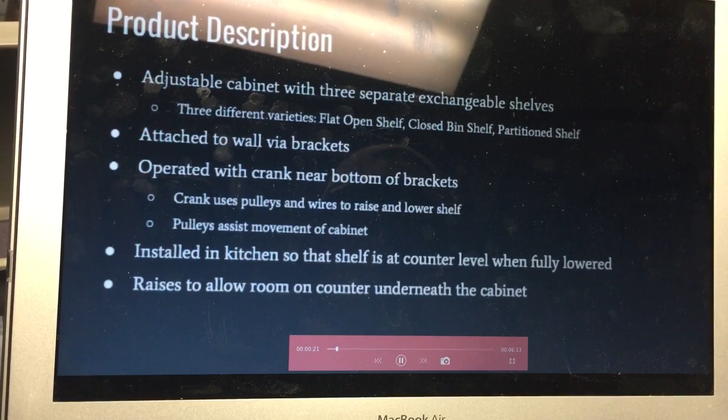Our product is an adjustable cabinet with 3 separate exchangeable shelves. These shelves come in 3 varieties: the flat open shelf, which is standard, the closed bin shelf to prevent things from falling down, and the partitioned shelf, which has dividers in the middle to separate items.

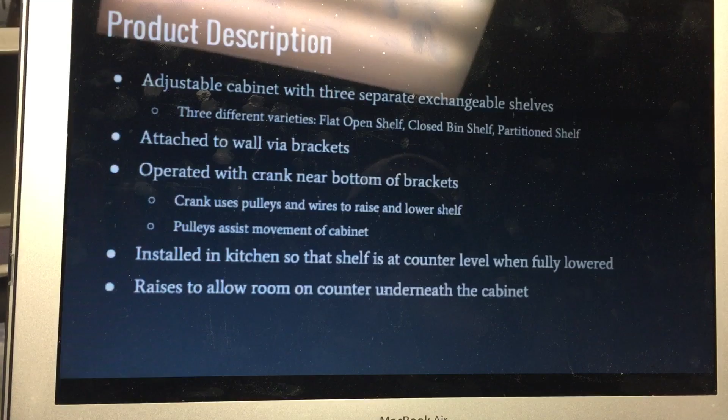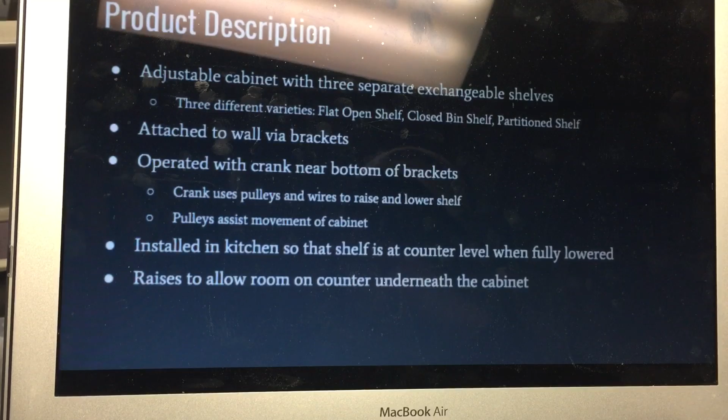The cabinet is attached to the walls through aluminum brackets. It is operated with a crank near the bottom that uses pulleys and wires to raise and lower the shelf. It can be installed in your kitchen so that the shelf is at counter level when fully lowered. When you crank it up, it allows for room under the cabinet for counter space.

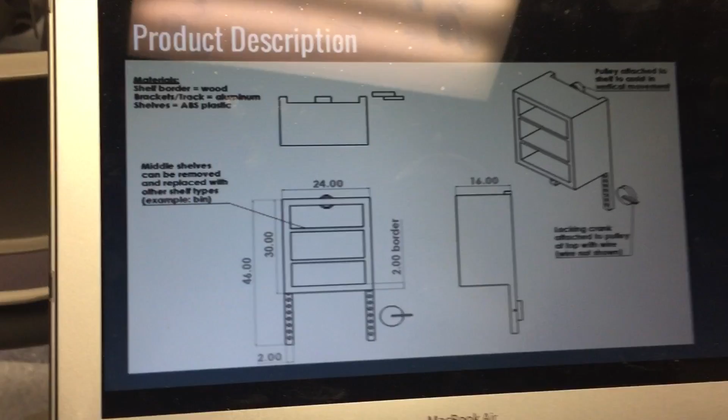Shown on this slide is the final design that we decided on with our group. The 3 views show each side of the product, and the isometric view shows how the adjustable shelf would look when mounted onto a wall. The measurements associated with the dimensions are in inches.

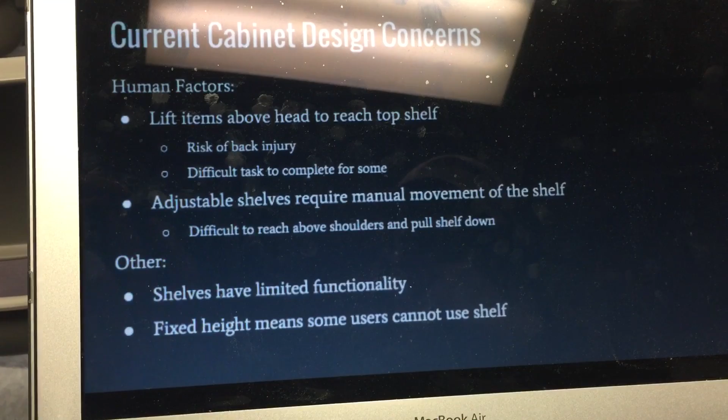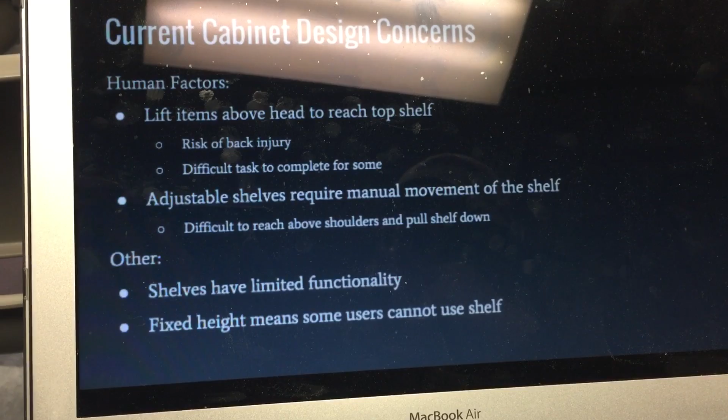There are a few human factors concerns with the way current cabinets are designed. One is that you would have to lift items above your head to reach the top shelf, and this could pose a risk of back injury by straining yourself, and this could also just be a difficult task for some people to complete. If they're too short or if they're in a wheelchair, it'll be nearly impossible to reach the top levels of a cabinet.

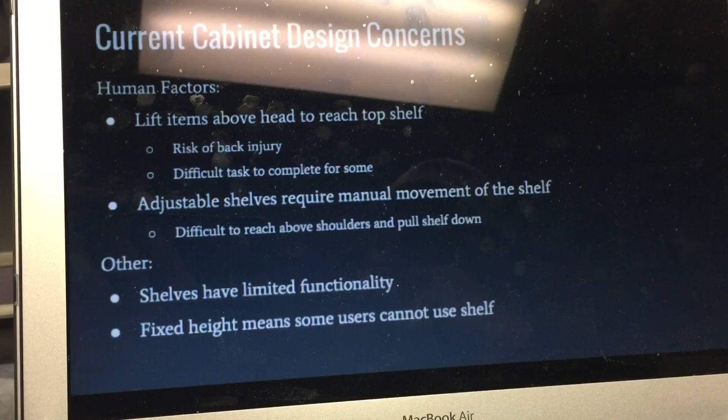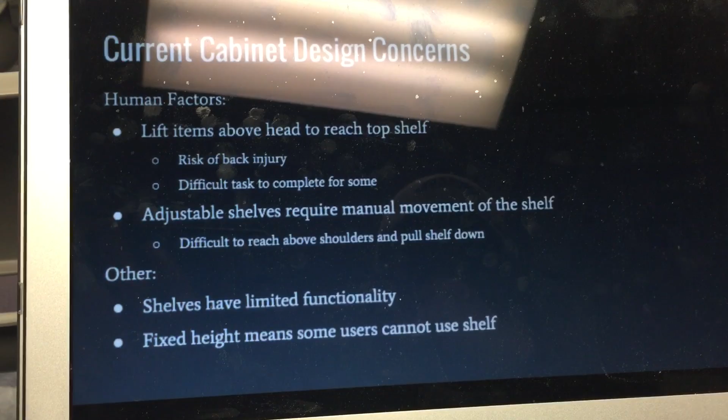And also, current adjustable shelves on the market require manual movement of the shelf, and it could be difficult to reach above the shoulders and pull the shelf down. Some other issues that current cabinets have is that the shelves have limited functionality, and like we mentioned before, the fixed height means that some users cannot reach the top of the shelf.

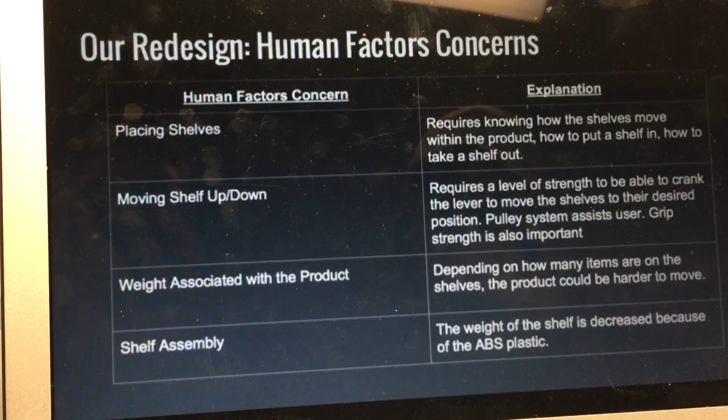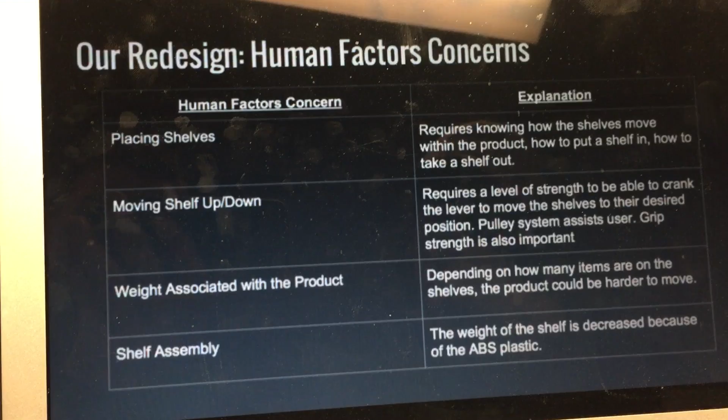There are a series of human factors concerns that are associated with the adjustable cabinet. Placing the shelves requires knowledge of how the shelves fit into their holders. This will need to be explained in an instruction manual to solve the human factors concerns. In The Design of Everyday Things, Don Norman talks about the importance of the user having the knowledge to know how to use the product. Without it, it is associated with a poor design instead of blaming the user.

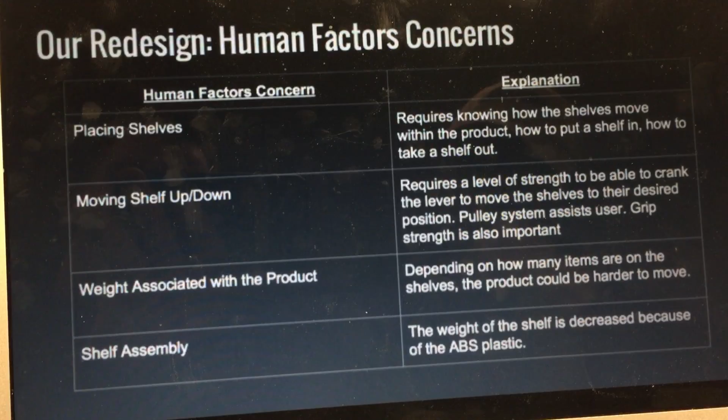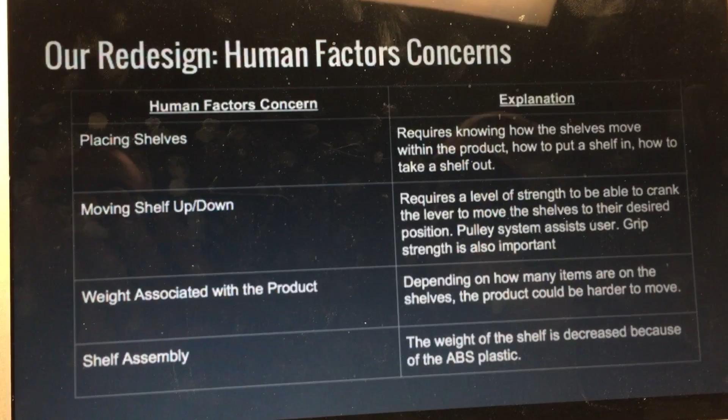Moving the shelves up and down is the next main human factors concern. Because we decided to go with a manual hand crank instead of an automated hand crank to cut the cost of the overall product, the adjustable shelf does require a certain amount of strength. We optimized the hand crank to make sure that it is the minimal amount of strength needed to operate the lever so that all ages of people will be able to use the adjustable shelf. The crank helps minimize the grip strength required because it is circular motion instead of a direct up or down motion.

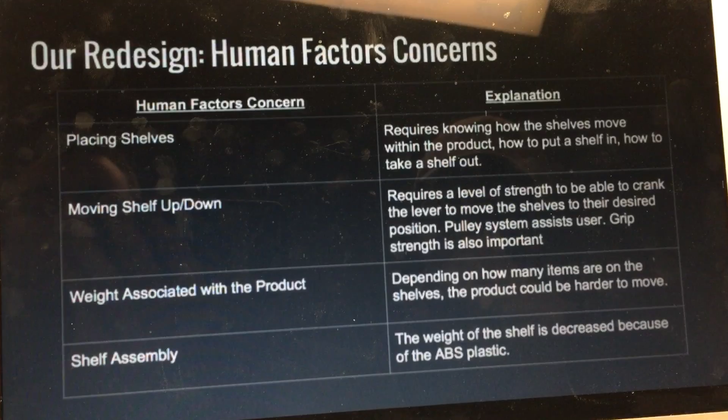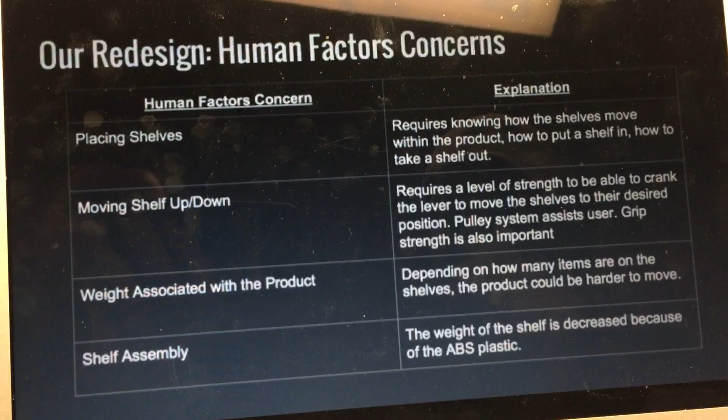Relating to this, the weight associated with the product plays a role in the human factors design. Depending on how many items are on the shelves, this could again make the shelves harder to move. It is important that the manufacturer informs the user that there is a weight limit associated with each individual shelf to ensure that the product is safe.

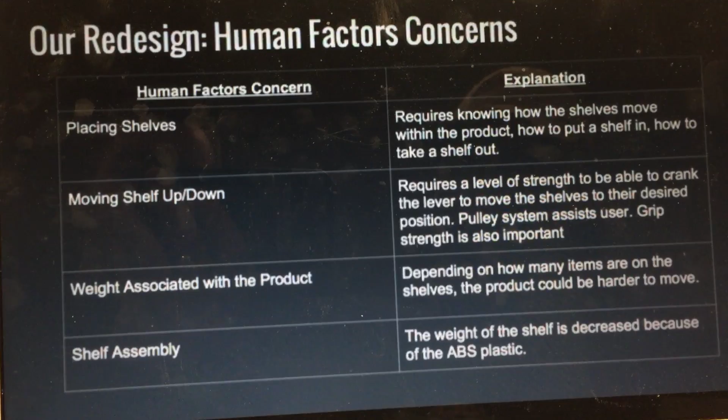Furthermore, the shelf assembly relates to the human factors design. The less pieces that are required to build the product makes it easier to assemble. Making the material of the shelf ABS plastic as opposed to wood or metal makes the shelf lighter and easier to mount.

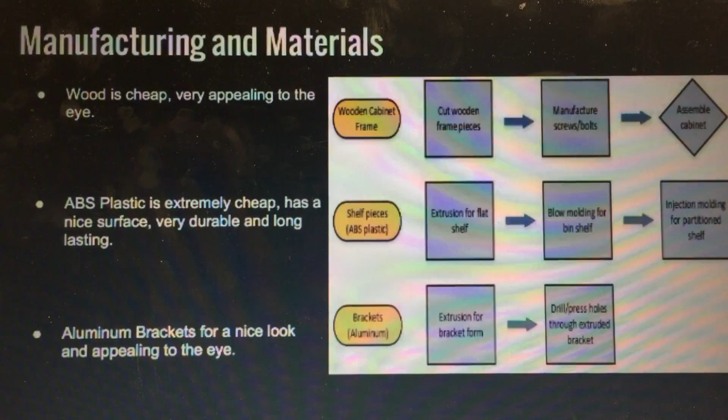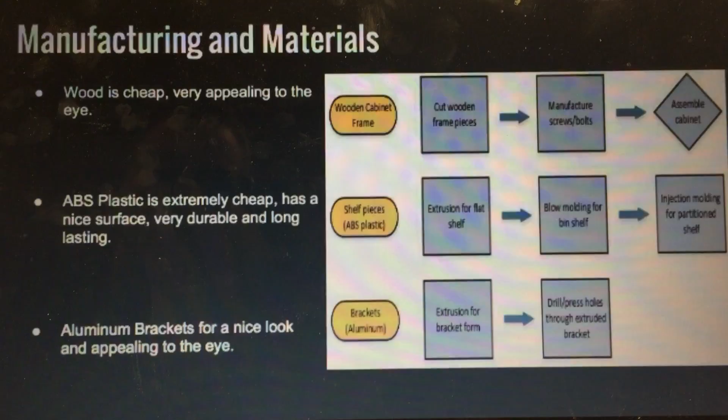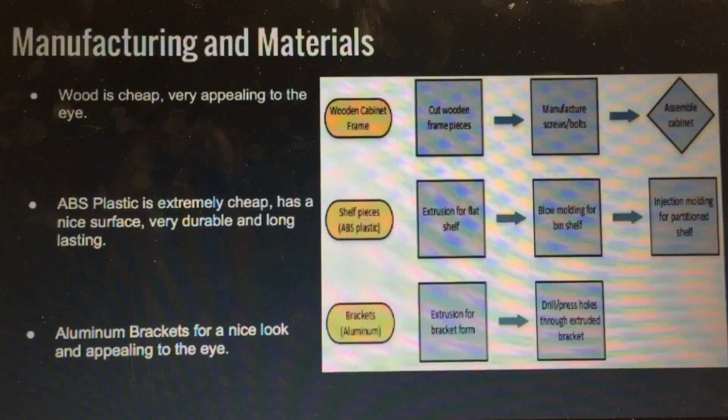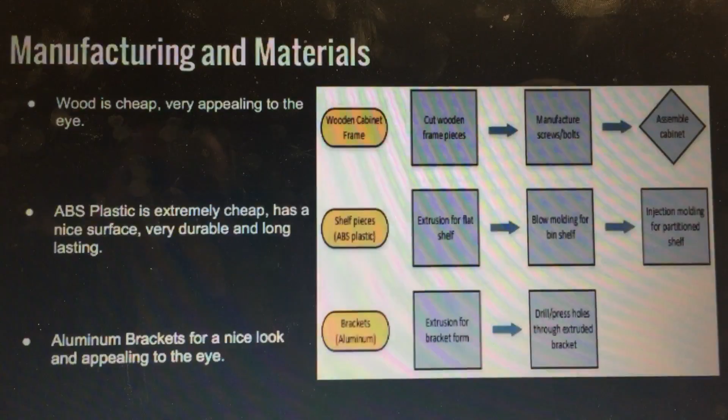We chose to extrude these parts for the flat shelf because it has the same cross-sectional area. Blow molding for the bin because it is hollow, and it is cheaper than the injection molding for the partition shelf. The brackets are made from aluminum and manufactured through extrusion because they too have the same cross-sectional area.

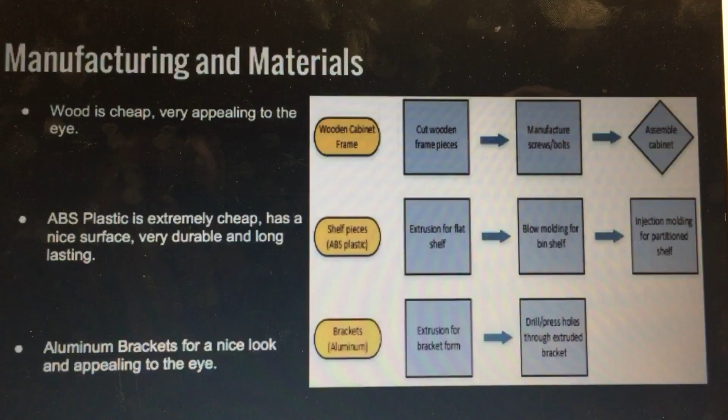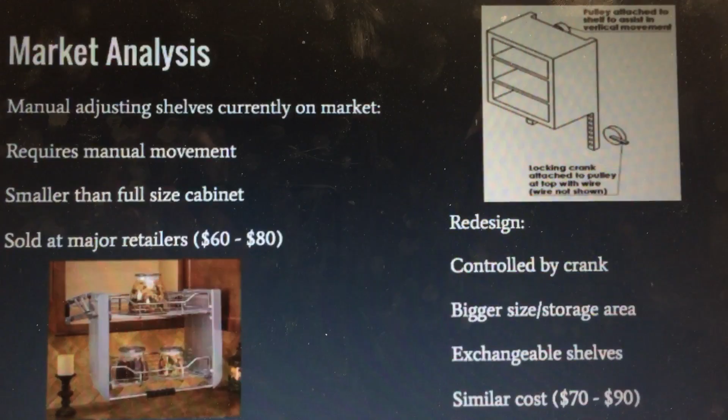During our market analysis, we found similar products. These products required manual movement, whereas our redesign will be controlled by a crank. This crank will be much easier and safer to use than manually adjusting a shelf, like the current competitors on the market. Also, the cabinets on the market currently are smaller than our redesign. Our redesigned cabinet will be bigger and will be able to hold more items than those currently on the market.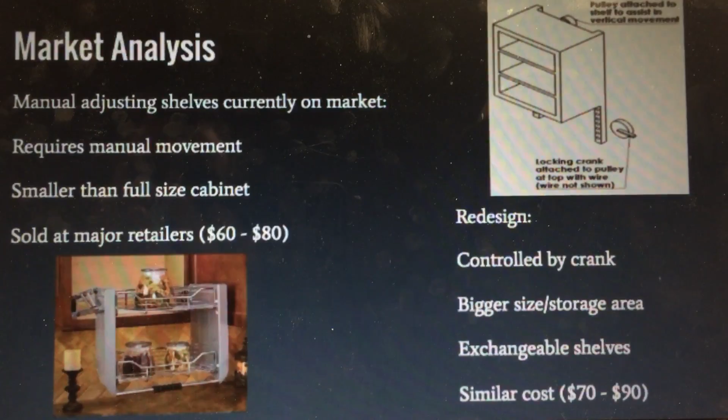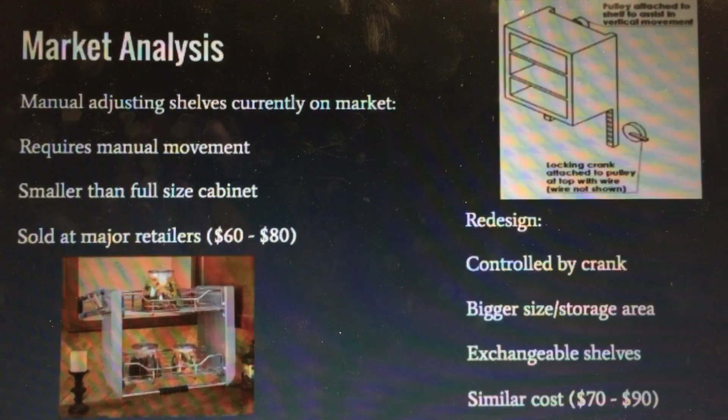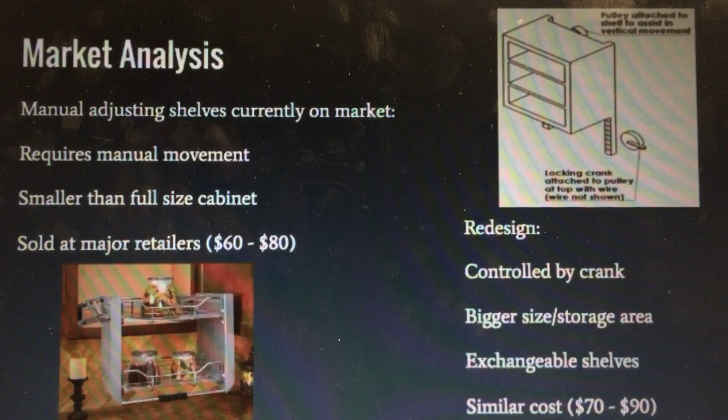An additional feature of our cabinet will be exchangeable shelves. There will be a flat shelf, a shelf that is like a bin, and a shelf that has multiple sections to it. The current adjustable shelves for sale are in the price range of $60 to $80 and are sold at most major retailers. Our group believes that we can make our redesigned cabinet for a similar cost.

There were a lot of things that we learned during this process of the product design labs in relation to what we learned in class. Through the 5 product design labs, we learned that there are multiple steps to be able to maximize the usability of the product. The engineer has to think logically as an engineer to make the best possible product, but also as the user to make sure that the product is as user-friendly as possible.

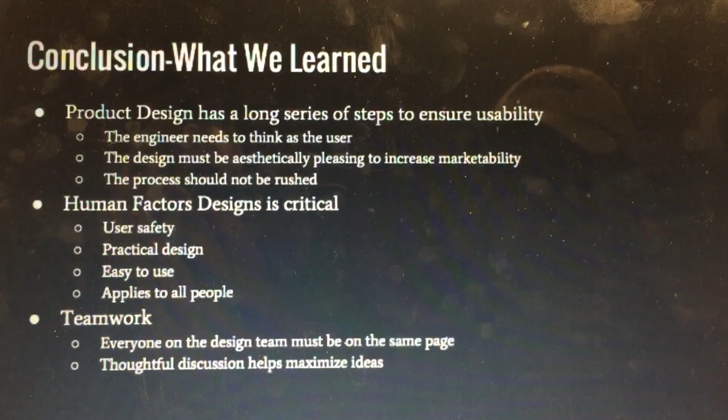As explained in The Design of Everyday Things, the product must be aesthetically pleasing to ensure the marketability of the product so that the customer wants to buy it. Rushing the design process will only lead to missing possible aspects of the design that will end up benefiting the product. Another part of these design labs that we learned along with the class was the importance of human factors. Focusing on the human factors of the product is important because it makes sure the product is safe, practical, and is able to be used by as wide of a range of people as possible.

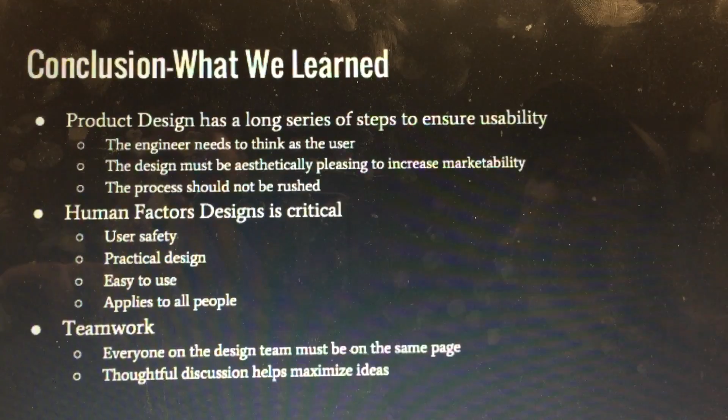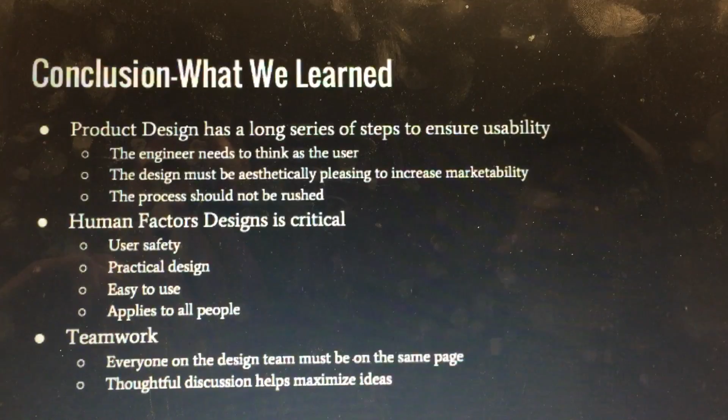Lastly, the execution of teamwork is almost directly related to the success of the product. It is necessary that everyone on the design team is on the same page so that the product can be made as efficiently as possible and within the given time constraints. Also, the thoughtful discussion of the group helps maximize the possible ideas, which in turn leads to a product that has been designed considering all aspects of the best possible product.